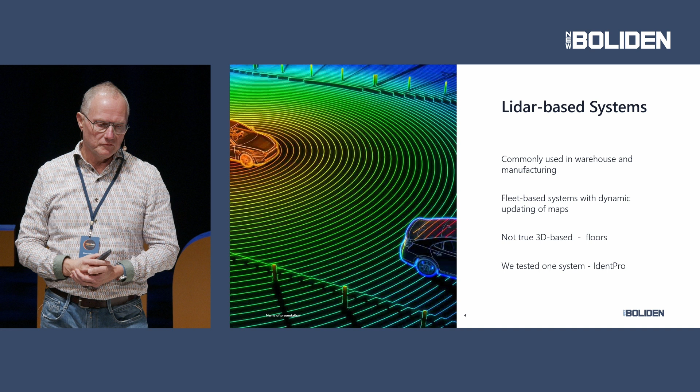Anyway, we did a test of one of these systems from a company called IdentPro. We installed a LiDAR sensor through a magnetic fitting onto a roof. This sensor can be positioned either in the front of a vehicle, on top of it, or at the back, because depending on the vehicle, you need to locate on different things.

So the sensor can look in any direction. You could also direct it to the side, and it would work at that time too. Nowadays, these companies are actually allowing you to buy the LiDAR sensor yourself. You don't have to rely on the one they supply, which could lead to these systems becoming a bit cheaper in the future.

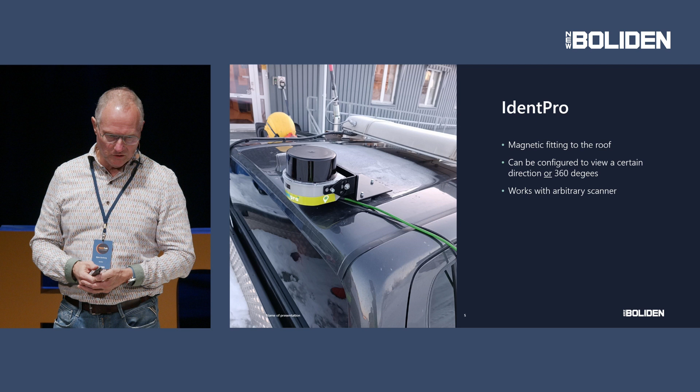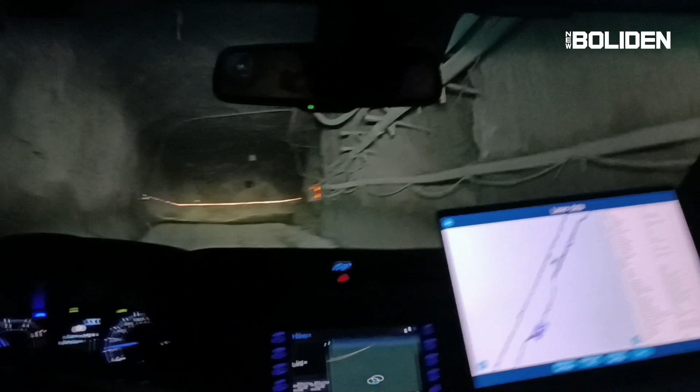So I will now start a video showing how we did this test. What we're seeing on the right side is the screen from the system, and in blue we see the recording of the mine. We did this as one run up and down. This is in Kankberg mine.

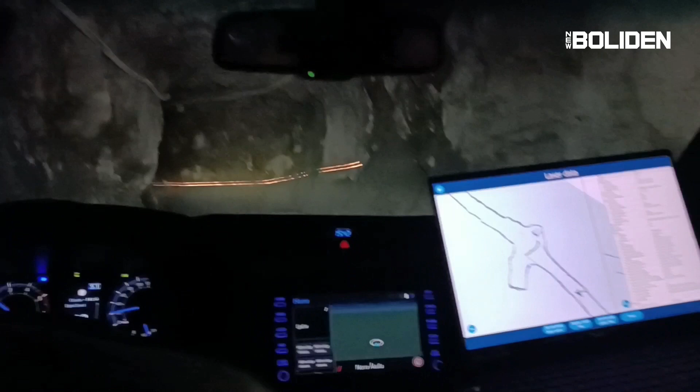We did a run up and down one time, and from that single recording we were quite surprised that it managed to locate itself at once. We're also surprised it managed to do this even though the road is quite bumpy, as you see.

This is a 2D LiDAR, notice, not a 3D one. So it has only scanned a line, but still it manages to trace where we are. We can also see on the screen that the person who helped us had to construct the floors of the mine, and that's why we're not seeing a constant 3D model of the decline going up there.

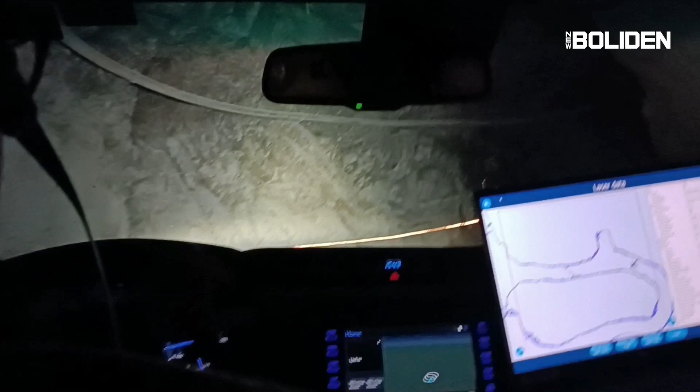We did test a bit to challenge this, driving close to one side of the wall versus the other, and it actually quite well can tell if you're close to one wall or another.

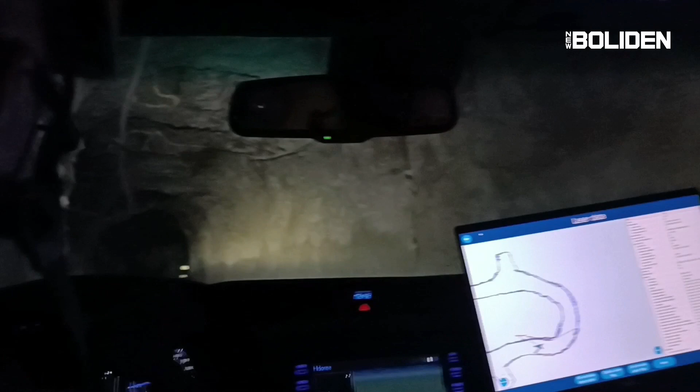We also tricked it by stopping at one place, switching off the LiDAR, then moving the car and switching it back on, and it again managed to find its location.

Near the end of this film, in a few seconds, the actual recording of the map is ending, and we can see how the system tries to continue building the model, but at a certain point it will run out of the backward-looking image data, and it completely fails to locate itself.

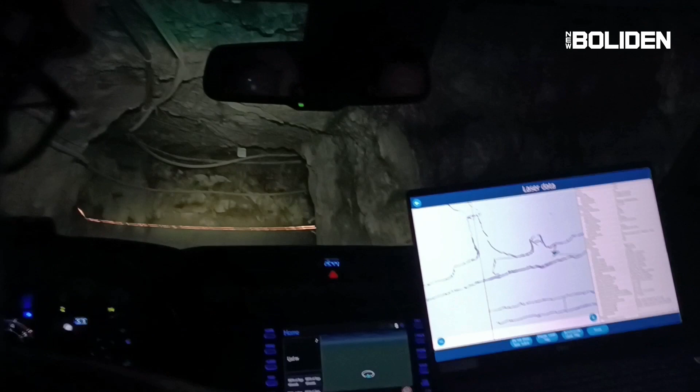To mention, this is purely the LiDAR data, so there is no IMU, no accelerometer sensor - it's purely looking at how it has recorded the mine. We'll give it a few seconds more and it will reach the end. We can see on the bottom of the screen where the recording is ending, and it will soon reach that part.

And we will see how it will try to build the model continuing after the recording. So here it starts to build the new model from what you're seeing, but after running this section, it finally completely stops a second here - so it's dropped out.

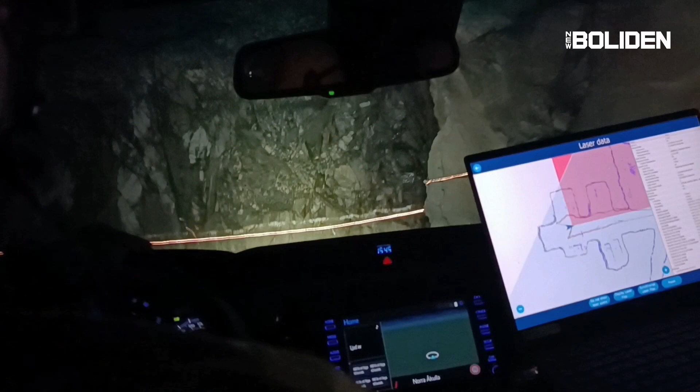Anyway, this is a technology that is quite interesting in that sense. If we can find a company that can do this in true 3D, it could be possible to use at once.

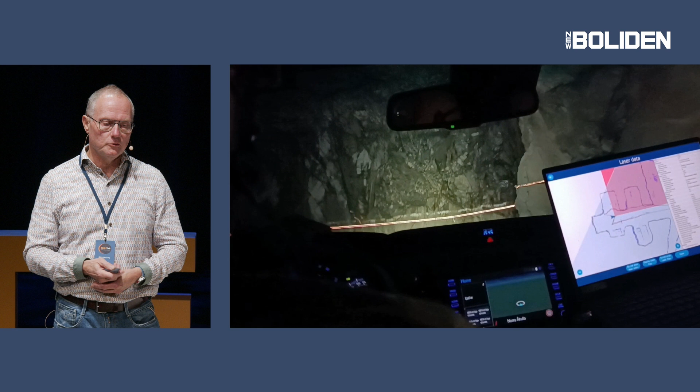Another system that is kicking in nowadays is vision-based localization. Basically it works the same way: you use normal cameras to record your environment, and from that a camera on the vehicle will recognize where it is. So we ran into a company called Immersal, a Finnish company, and together with them we will make a pilot in the coming month to see if they can do that.

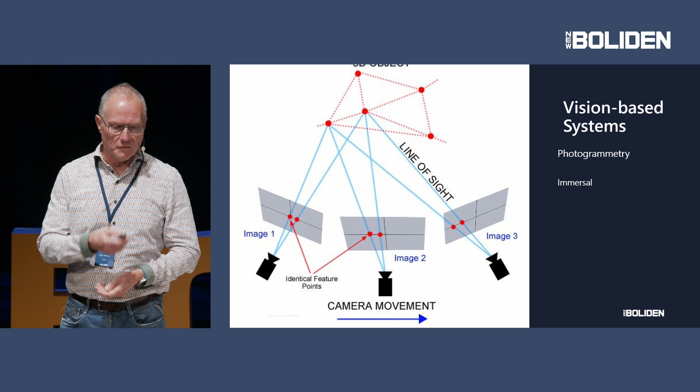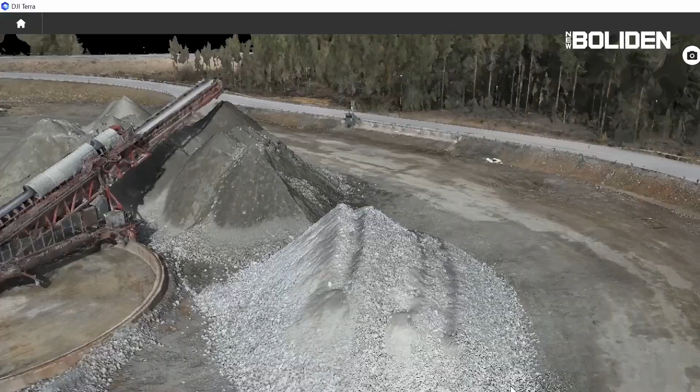The technology behind this is photogrammetry, and by coincidence I can show another usage of photogrammetry to get a hint of how it works. I will start a video here. What we're seeing here is a 3D model of the stockpile area of the concentrator plant in Boliden. This 3D model has been created from around 700 JPEG images taken from a drone that was flying for about 15 minutes over this area.

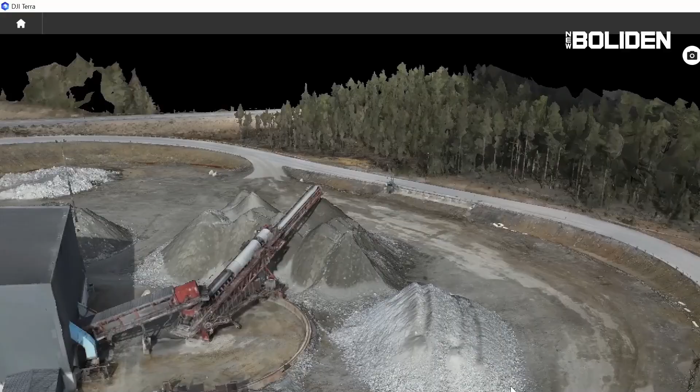Processing these roughly 700 images in software makes this model, which I think is quite astonishing in its detail. As you can see, I'm zooming into those rocks, and it has virtually been able to identify each rock in that pile based on photographs from, I think, 110 meters height.

So this is the technology that this other company is utilizing, but they are doing this underground. They claim that it will work even though the light is very low; they say a low beam light on a car should do the job. But let's see if that will work.

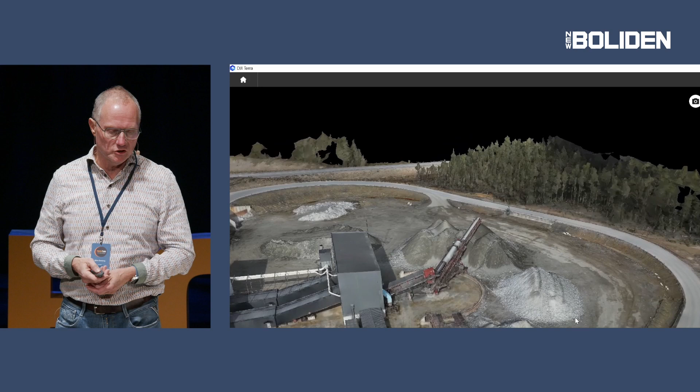Okay, back to Wi-Fi. As said, we are using Wi-Fi now with the Mobilaris system, but there are also some other companies doing proprietary Wi-Fi based systems. One is called Cohda Wireless, a company we planned to do a pilot with, but for various reasons we decided not to pursue that system. Cohda Wireless has a huge installation in a mine in Mongolia, where they have some 200 autonomous vehicles being localized with their system. So it seemingly works quite well, but once again, it's a proprietary system.

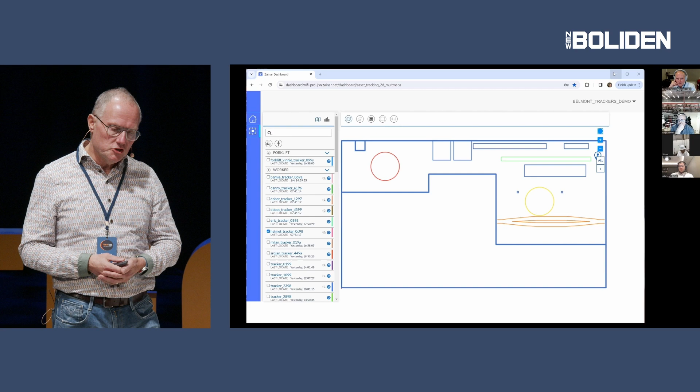Another proprietary system is a company called Zainar, which claims that they can do positioning from virtually any Wi-Fi infrastructure. We did get a presentation from them. This is a short video that will go several rounds, so you don't have to follow. If you look at that green line up there, you will see an icon moving along that line. This is a warehouse building in San Francisco. I don't know where these guys were.

At this presentation, we were seeing how this guy was moving along that area, and now he's placing himself in the corner. If you look at this super tiny spot next to the lowest part, you can see this guy with a hard hat. He is the guy who is walking around here. So we're seeing in real time how he's located between those shelves, and he's eventually ending up at that corner, so to say.

This is very interesting. We wanted to play with these guys, but they are actually kicking us out. They don't want to play with us. They say they have other customers that they are focusing on more. So that was a bummer. We had planned to do this in one of the areas in our office to see if this would work.

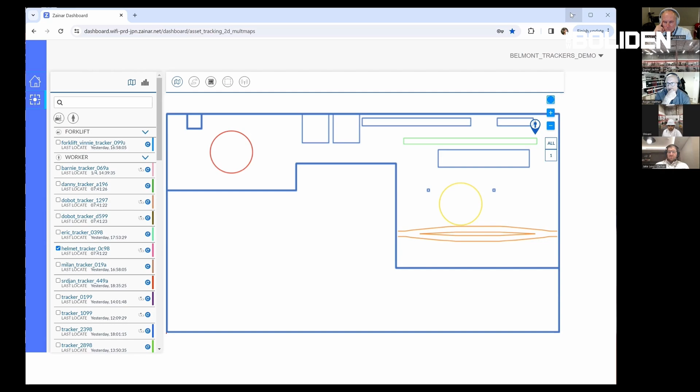But more on Wi-Fi. There are a lot of things happening in Wi-Fi in the sense that the Wi-Fi standard is changing all the time. A recent name is 802.11az, a standard that came out in March 23, some AI told me yesterday. What that standard gives is that nowadays, with any Wi-Fi client, like your mobile phone, when it connects to an access point with this newest standard, you can ask the access point what the distance to you is. And then you will actually get a distance to each access point of this new standard.

So once again, it's not really any software you need to buy. It's in the standard. Of course, we were very curious to figure out how this works. So we bought a handful of these Wi-Fi access points supporting this new standard, installed them in the mine, and did some tests, and it worked really well, surprisingly well, I have to say. We managed to position ourselves very accurately. And it works so well that we would of course like to show this to you here and now. Let's see if we can make this.

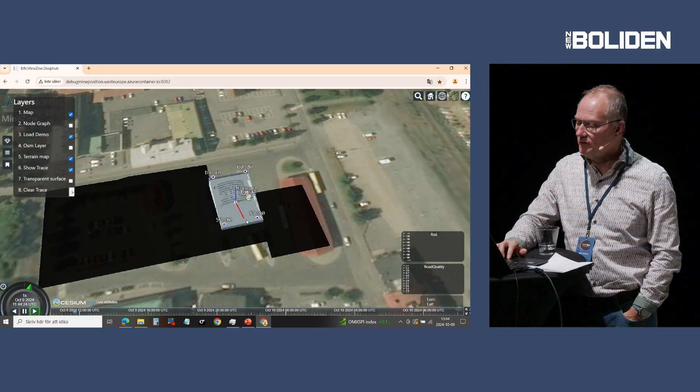So what we are seeing here, I will actually do like this. So what we're seeing here is a model of this very building we're in, if you recognize yourself. So if we actually scroll out, we're seeing this on downtown Skellefteå. And this sort of black footprint is the footprint of the Sara Culture House. And here is this

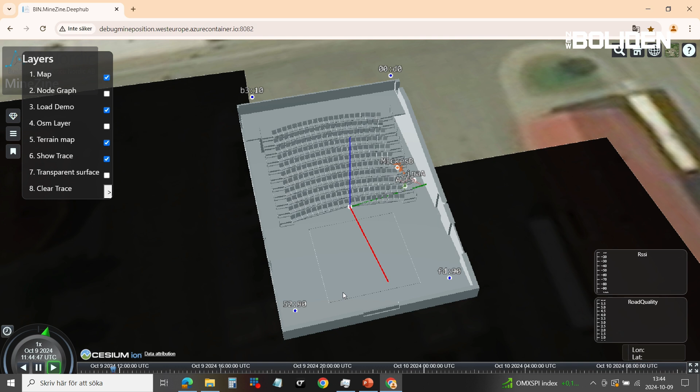this room. What we can see here, there are 4 dots in the corners here, and this indicates the locations of 4 access points that we have installed up here in the back and up here. And what we're now seeing is that we have some colleagues from BI Nordic, the guys that helped us do this, which are now walking around in this room. So, well, you can run around a bit so we can see.

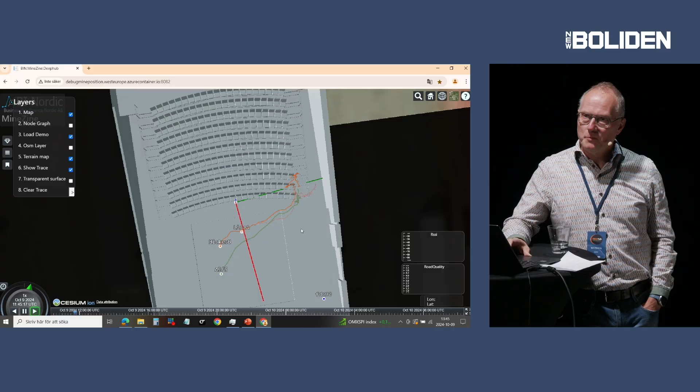This is basically how you will be traced in the future. It should be mentioned that this standard is based on the principle that you, as a client, can get this information from the access point, but at least right now, the access point cannot get the information from you.

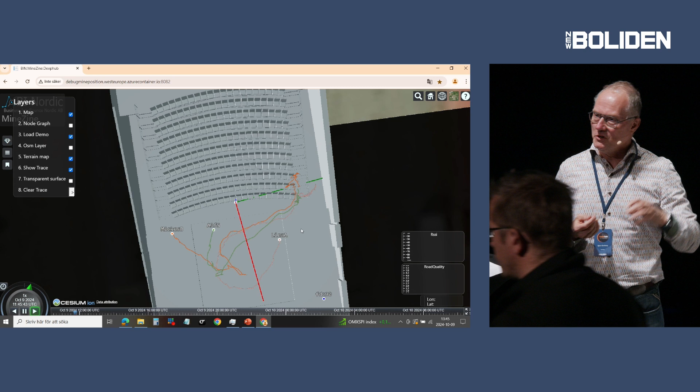So what these guys have in their phones is an app which is sort of reflecting the measurements that the phones are getting and are telling that to a cloud service and then making this model on this one. But that is a quite simple app that is just reflecting that information.

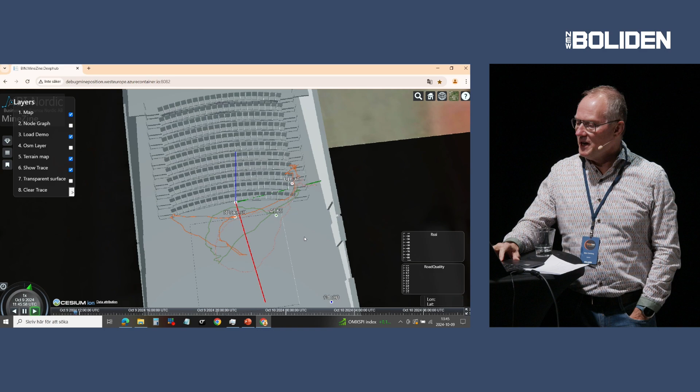So this is made by our colleagues at BI Nordic, so they are the ones helping me out on walking around here. And yeah, this we think can also be quite a game changer in short time if we can get this to do the job for us in underground positioning. That's basically what I was about to say, and then I can fulfill what I started.

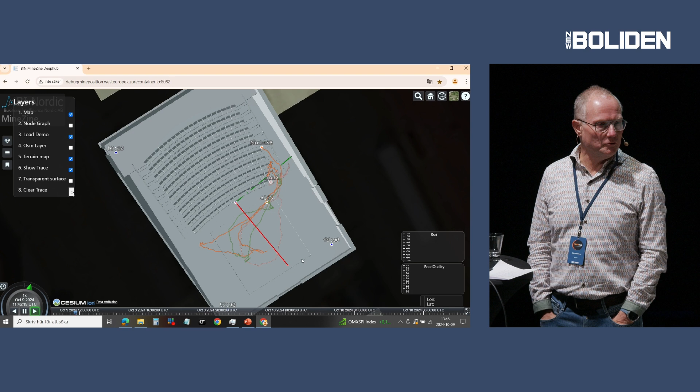So I said that Momme's presentation in the beginning was cancelled, and that was simply of pure fear that the stuff he was presenting would disturb this presentation, because he has an actual device that he was going to install here in the building that would sort of hijack SSIDs, hijack wireless networks, and we didn't really have time to verify that his system did not mess with this one. It would be sort of a showstopper if it didn't work.

That's about what I was about to say, a bit shorter since we now didn't have Momme's presentation. Any questions on this? Okay. I'm actually going to throw now. So.

Excellent. I really loved this demo, and I guess you kind of mentioned it, but just to be more specific, I guess you need to upgrade your Wi-Fi hardware to be compliant with this standard before it works, or do the previous generations have some kind of beta version of this already?

Yes, it requires that the hardware, the access points, are of a certain generation. Possibly some older ones can be updated with firmware. I don't really know that. But what we have tested here is actually HPE Aruba stuff. That is not the standard that we're using in our mines.

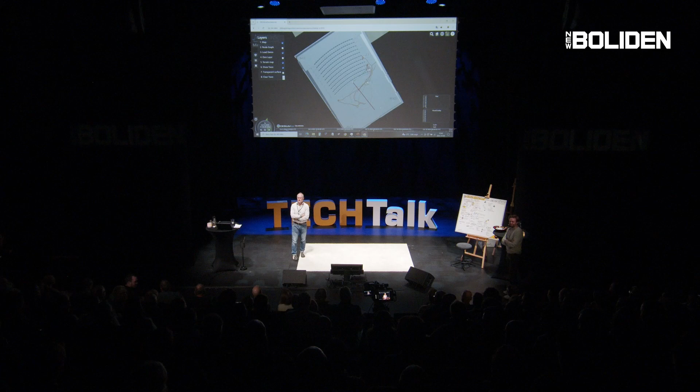Okay, more to answer your question about the access points and infrastructure. As Björn mentioned, this was the Aruba installation. But when it comes to Cisco that we are using, you need to go towards, for 802.11az, the 9130 access point, 9166, and some intermediary model called like 3165 or something, no, 63 or something like that. But you can search for that.

So anyway, as we do continuously update our hardware, by time, knock on wood, with the supplier Cisco that we're using, we would reach this ability too.